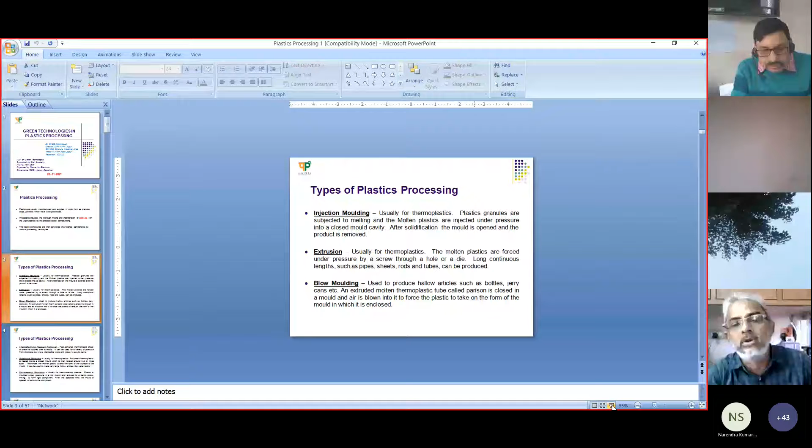What is extrusion? Extrusion is usually for thermoplastics. The molten plastics are forced under pressure by a screw through a hole or die. Extrusion is generally done for hollow products, like producing a pipe, electrical conduit pipe, agriculture pipe, or water irrigation pipe. It is a continuous process, so you can produce a hollow product like pipes, or a profile like a sheet, such as plastic doors. These are made with extrusion only. The molten plastic is continuously forced through a die or hole, so long continuous lengths can be produced, such as pipes, sheets, rods and tubes.

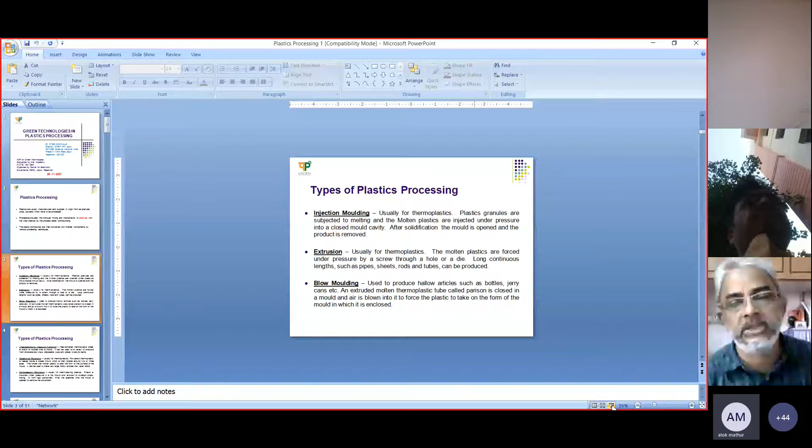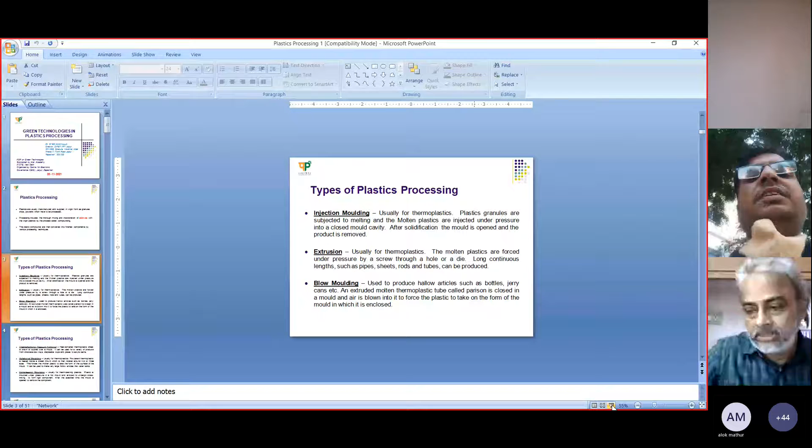Then blow molding. Blow molding is generally done for producing jerry cans or water tanks, like overhead water tanks of 250 liter, 500 liter, 1000 liter, up to 3000 liter big tanks, using blow molding. Whatever the size of the product, that much tube is extruded, then closed in a mold, and using blowing air, it is expanded to the shape of the product. I'll discuss that in detail later.

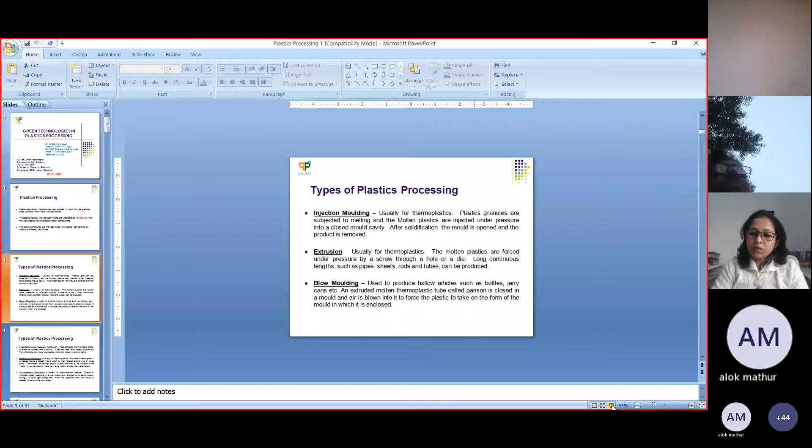Then we have rotational molding. We already discussed blow molding, so the replica of that is rotational molding. Instead of producing a plastic molten tube and blowing air into it to make a product, here you have a big mold, and in that you add plastic powder into the mold, then close it, and it is a hot mold.

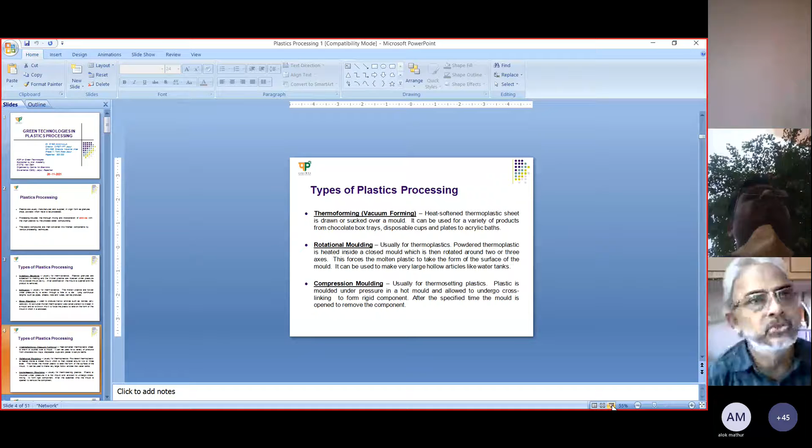Inside the material is completely melted, and you are rotating the mold biaxially, both vertical and horizontal, simultaneously. So the mold completely takes the shape of the inside mold, and once you remove it, you can produce the article.

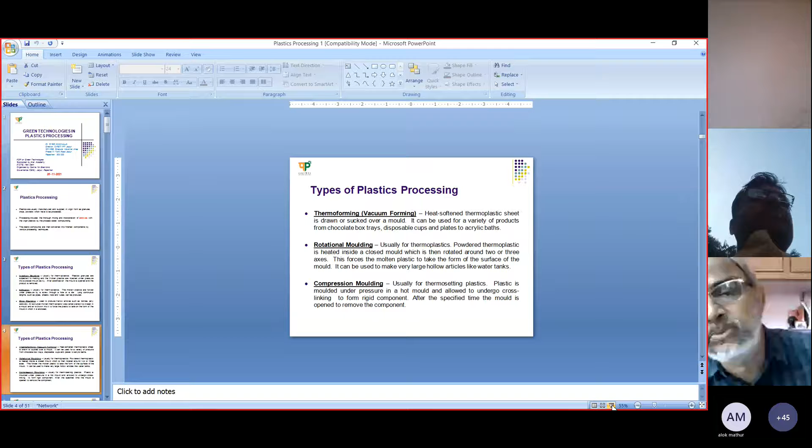Then we have compression molding. Everybody knows about this very simple process, usually for thermosetting plastics. The material is melted and a hot mold is there in the two plate compression molding machine. You add the plastic material, close the cavity, run the cooling water, and you produce the products. So compression molding is simple.

Then calendering process also is there for producing plastic products, like vinyl flooring you would have seen. Now railways or omnibuses, the flooring is made up of polyvinyl chloride. So these are all produced in the calendering process.

Then casting is there, like metal processing people, mechanical engineering people may know. So casting process is also there in plastics processing, mainly used for thermosetting materials.

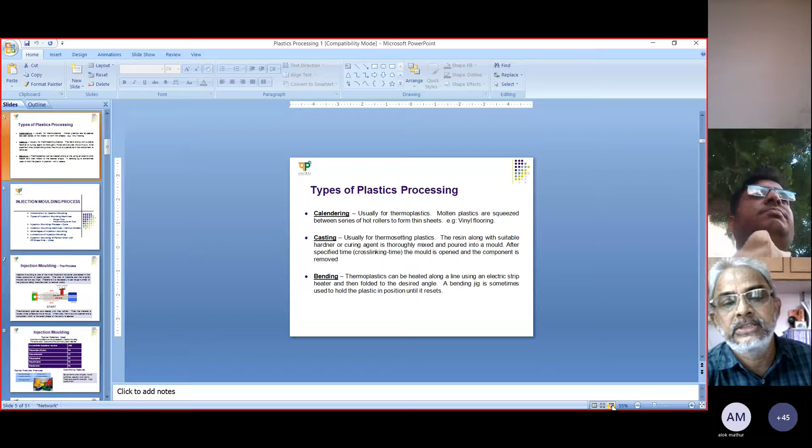Then we have a bending process, where thermoplastics can be heated along a line using an electric strip heater and then folded into the desired angles. This process is also done, but it is very rare.

So mostly the injection molding process is used. Now let us go to the injection molding process.

This is the, sir आपको दिख रहा है अभी? Yes sir, दिख रहा है. हाँ, yes sir, injection molding the process. Yes sir. Okay, now we are in line. Okay, but when I am making a presentation, it is not coming. That is the issue. Okay. Screen बहुत छोटा दिख रहा है ना sir? नहीं, कोई बात नहीं sir.

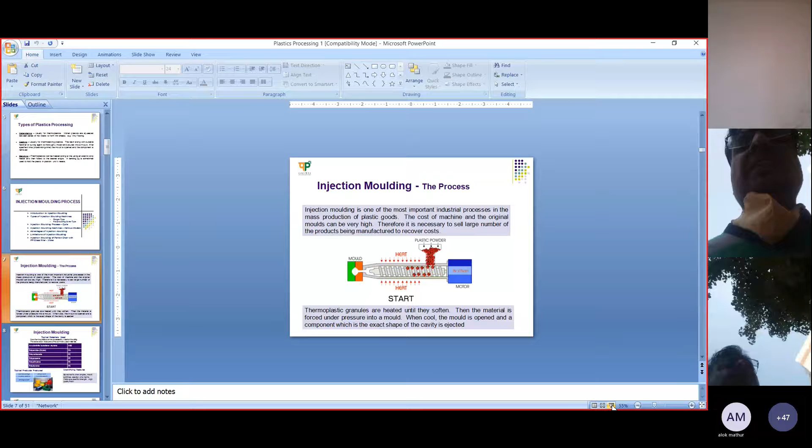Injection molding, in a simple way, is one of the most important industrial processes in the mass production of plastic goods. The cost of the machine and the original mold can be very high.

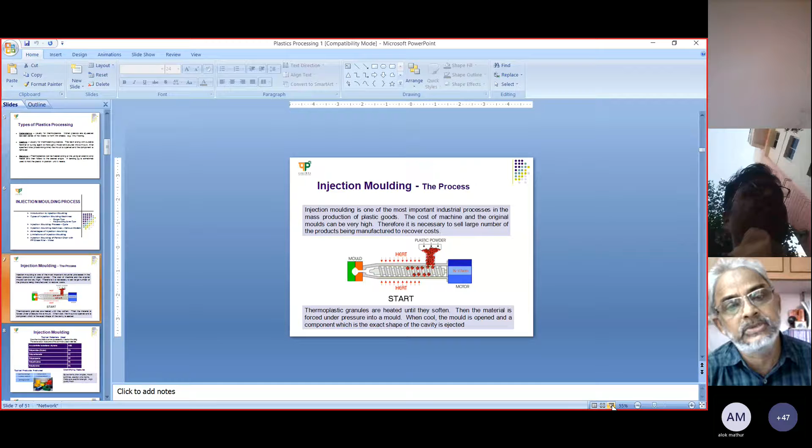Sometimes, for your chair, I have one video I will show you. So producing a chair, the machine is, say for example, around 50 lakhs, and the mold may cost more than the machine. Because the mold is more intricate, parts have to be manufactured and assembled, so the mold cost goes up. Similarly, the type of material, which type of hard steel you are using, or HS, whatever it may be, that kind of steel quality also increases the price of the mold. So sometimes the mold cost will be very high.

Therefore, it is necessary to sell a large number of the products manufactured to recover the cost. So generally in injection molding, mass production is done. It is a batch process, not a continuous one. After one component, another component is produced.

Here you see the plastic in powder form or granules is fed through the hopper into the barrel, where inside the barrel we have a screw and heaters are banded onto the barrel. So when the barrel gets heated and the screw is rotating, the material is slowly melted and conveyed to the front portion of the injection molding machine.

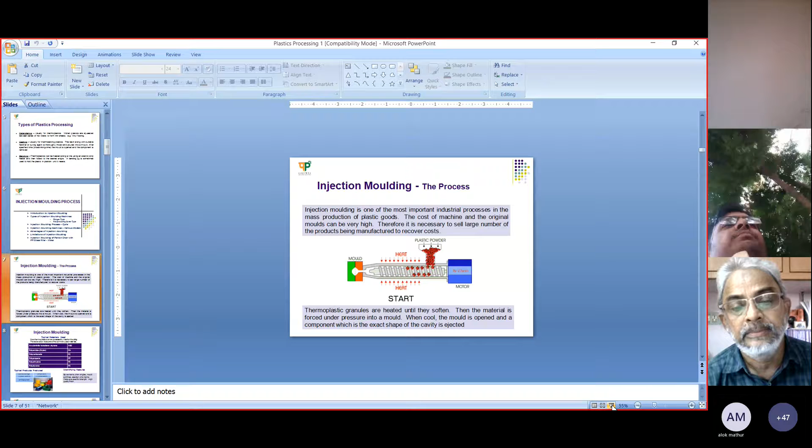So thermoplastic granules are heated until they soften. Then the material is forced under pressure into the mold. When it cools, the mold is opened and a component, the exact shape of the cavity, is ejected.

So this is the typical materials used. There are many materials; for example, I have given some here: acrylonitrile butadiene styrene, polyamide that is nylon, then polycarbonate, polypropylene, polyethylene, polystyrene. These are some of the thermoplastic materials I have mentioned here.

Generally ABS is used, ABS or PC-ABS blends are used in our mobile phones, TV cabinets, and so many applications we have PC-ABS. Then polyethylene, polypropylene are conventional thermoplastics used in domestic applications.

So typical products produced using injection molding, you can see, even the trays where you have milk crates are produced using the injection molding process. Big milk crates also can be produced. Even buckets, mugs, all these are injection molded materials.

Then we have identifying features like sprue marks, draft angle, mold split lines. These are some technical terms by which you can identify whether a product is injection molded or not. No need to go into that detail.

Then injection molded items, I have shown here: wireless phones, mobile phone casings, then plugs, and even a pen can be produced using the injection molding process. The steering wheel of the automobile is produced, and even the dashboard of your car can be produced using injection molding.

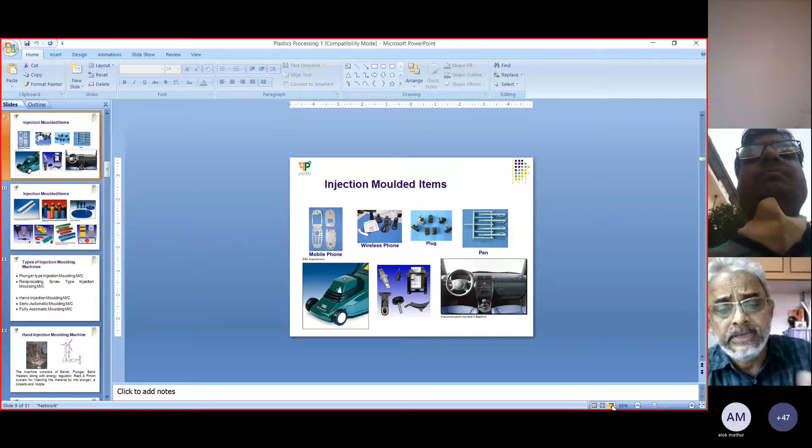Here I have seen some grass cutting machines or vacuum cleaning machines. These cabins, everything can be produced using injection molding. So injection molding is a very versatile process and very important in producing plastic components. These are other injection molded components you can see, examples, even a small comb as shown here. Even electrical components are produced using injection molding. See, these are the injection molded items. You will be surprised to see so many things are produced using injection molding.

Very high precision injection moldings are used for producing very fine engineering products like mobile phone casings and all these things, right? So these are also other products you can see.

Now you see types of injection molding machines. Are you able to see? Yes sir, types of injection molding machines.

As I told you in the very beginning, all plastic technology is only around 5 decades old. Not much before 1960s, nobody knew what plastic materials are. These are all new materials, invented with the long chain molecules by Hermann Staudinger. These were introduced to our civilization, and now we are almost living in the plastic age, right?

So at the very initial stage, plastic injection molding was plunger type, very old type. Then reciprocating screw is mostly used nowadays in commercial machines - reciprocating screw type injection molding machine. For giving training to skilled manpower, you start with even a small hand injection molding machine, semi-automatic, and fully automatic machines with fully microprocessor controlled machines are available, right?

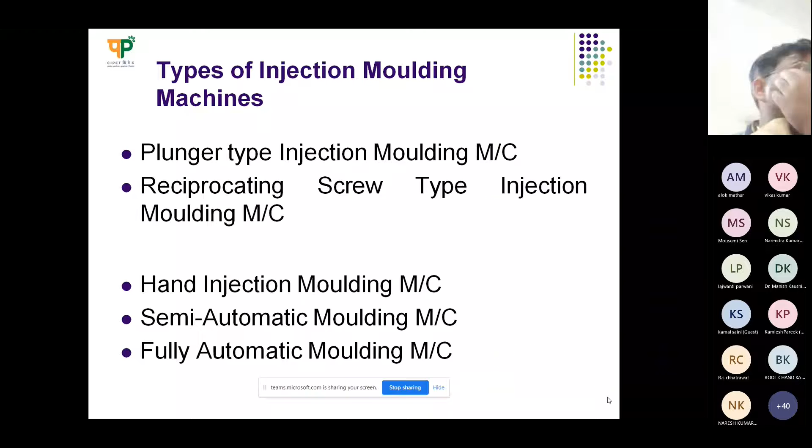But this is not very economic now. Almost all hand injection molding machines are now used only for training purposes, that's all, right? So the machine consists of a barrel, plunger, and band heater, along with the energy regulator, rack and pinion system for injection - injecting the material by plunger. A torpedo and a nozzle will be there.

Next slide, you see this here now. So there is a vertical injection molding machine on the left side, and a horizontal injection molding machine.

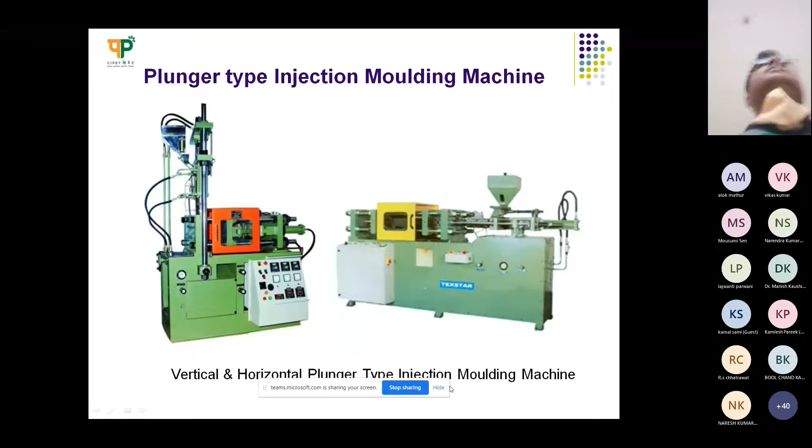Now it's clear, sir, the slides? Yes sir, thank you so much. Now I think the problem is solved. Sir, it is very good. Don't ask again, thank you, thank you.

So the plunger type injection molding machine you see here, it will have a plunger which can move up and down, and where we have the bottom, we have a mold kept here, and this is the barrel where the plastic mold melt is accumulated, and it will be pushed into the mold. This is another block diagram.

You can see the reciprocating screw type injection molding machine, where we have a cross section of the machine here. Now we have a barrel. The pink color is the material which is melted, and it is pushed into the cavity where we have a U type component here, right?

So the molten plastic granules are fed into the hopper, and then it is melted due to the band heaters of the barrel. I can tell you, when the granules are touching the barrel, there will be a very small clearance. So most of the melting energy is produced by friction. 80% of the energy required for melting the plastic granules is produced through friction between the barrel and the screw, and the barrel itself is a hot surface. So the remaining 20% energy is derived from that, and it will be completely made into a homogeneous molten plastic material, which will not have any granules or particles, nothing. It's a completely liquid kind of highly viscous molten thermoplastic material which is accumulated in the front.

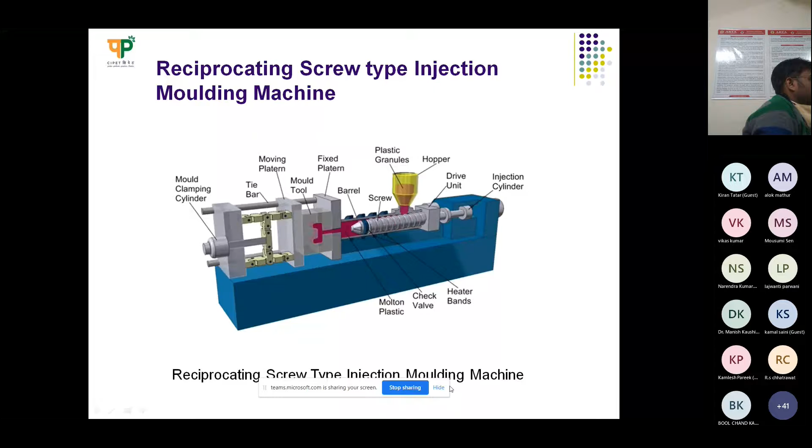So near the feeding we will have more gap, and when it comes to the compression zone, the gap will be reduced and the pressure will increase, friction also will increase, and the material will become completely melted. So when it comes to the metering zone, the melt is pushed and conveyed to the front portion.

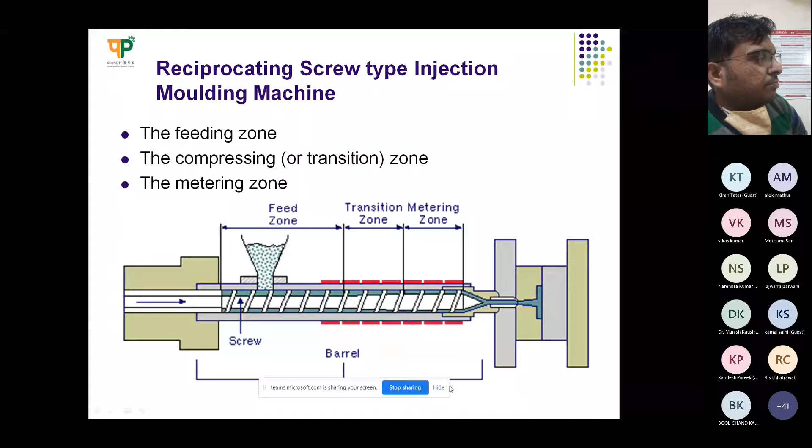These are the various components of an injection molding machine, where we have a rotating and reciprocating screw. Then there's a barrel, band heaters, the hopper, and nozzle. You can call these some of the components or parts of the injection molding machine.

So the injection chamber, where the melt is accumulated, and immediately the product you can see, that is called sprue. So it is actually waste. You have to remove it, and then you can again melt and recycle it, use it again.

This is the stationary plate which is attached to the nozzle, and the movable plate will be attached to the toggle system, where the opening and closing of the mold takes place.

The injection process: the reciprocating screw plasticizes the material, meaning it makes the melt - the granules will be completely fused and melted. It then injects the molten material into a closed mold via a channel system of gates and runners.

You have multi-component, multi-cavity systems. So at one stretch you can produce 10-15 components, and sometimes for small components, even 100 components can be produced.

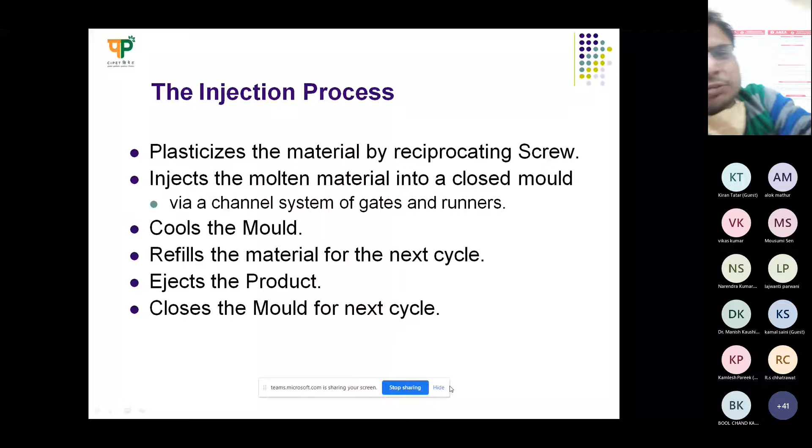In that case, the melt will be running in the mold, that is called the runners, and the gate point is where the material enters into the cavity. Then the mold cools, and after solidification you can remove the product. This is called a complete one cycle.

Then again the mold is closed for the next cycle. So these are the various processes you can see.

In the first phase, the mold is closed and melt is ready for injection. Then the cavity fills as the reciprocating screw moves forward as a plunger, and the melt enters into the cavity.

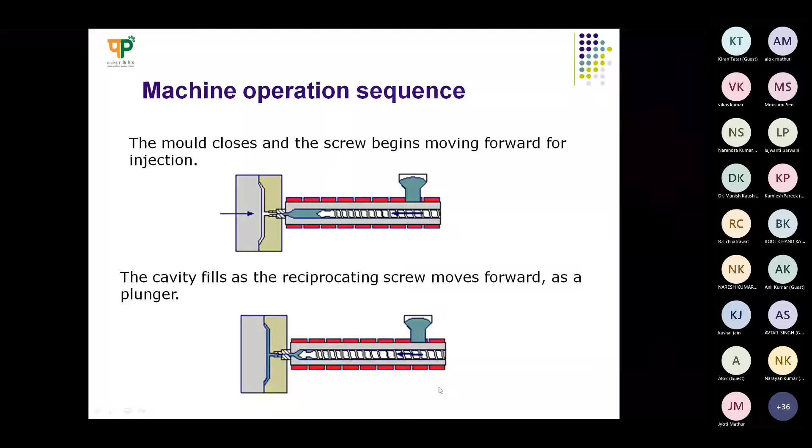This is the second step. This is the third step now, where the cavity is packed as the screw continuously moves forward. Then the cavity cools as the gate freezes.

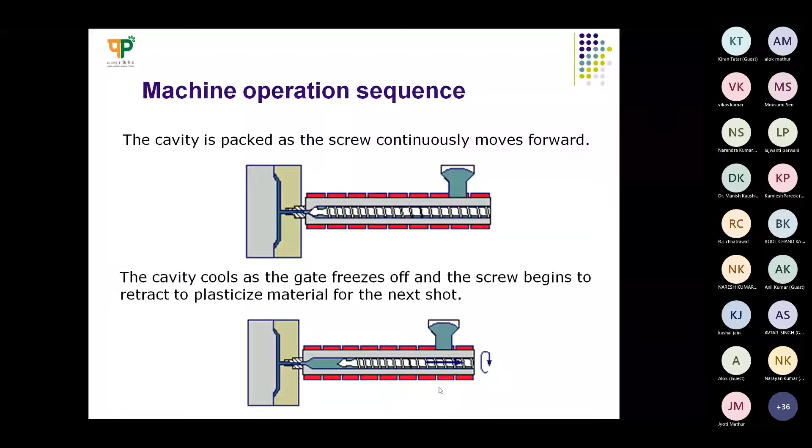This is the point where the gate is, where the melt enters into the cavity. So once the gate freezes, the screw goes back. Then the component is solidified and removed from the mold - the mold is opened, the part removed, and then the mold is prepared for the next cycle.

Again, here it is illustrated in different diagrams - three plate mold, two plate mold. These kinds of terminologies are used in injection molding.

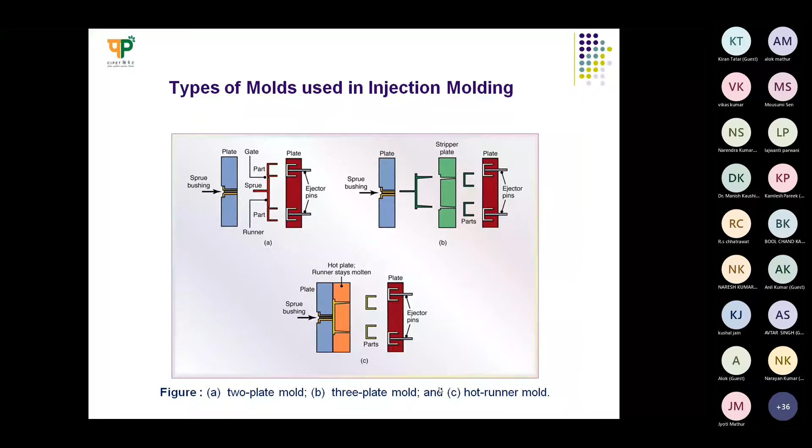Injection molding machines differ in both injection unit and clamping systems, as I told you. There have been a lot of developments in this, and more advanced machines have come. Sometimes hydraulic systems are used for clamping the mold, where oil leakage and oil consumption will be there - again oil filling, these kinds of problems will be there.

So advantages of the injection molding process, these are all I'll give you later. Parts can be produced at high production rates. Large volume production is possible. Relatively low labor cost per unit is obtainable. The process is highly susceptible to automation.

Parts require little or no finishing, right? At this stage, you can produce the finished product. Many colors and finishes are available, which can be added into the granules. Complex shapes can be molded, and for many shapes this process is the most economical way to fabricate. The process permits manufacture of very small parts, which are almost impossible to fabricate in quantities by other methods.

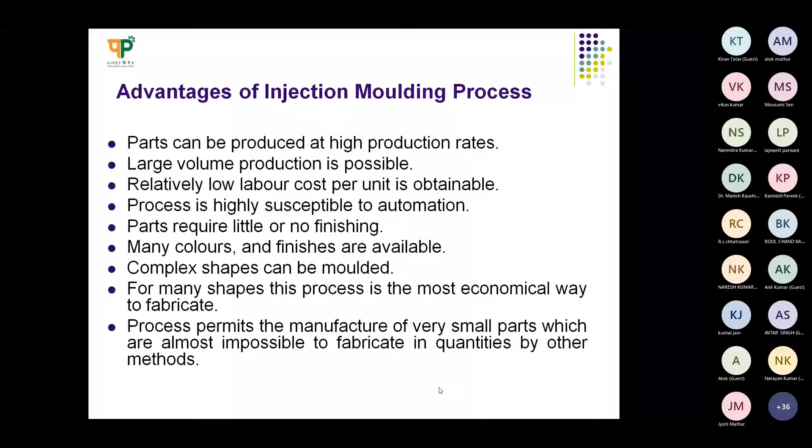These are some of the other additional advantages, like wastage will be less, and close dimensional tolerances can be achieved.

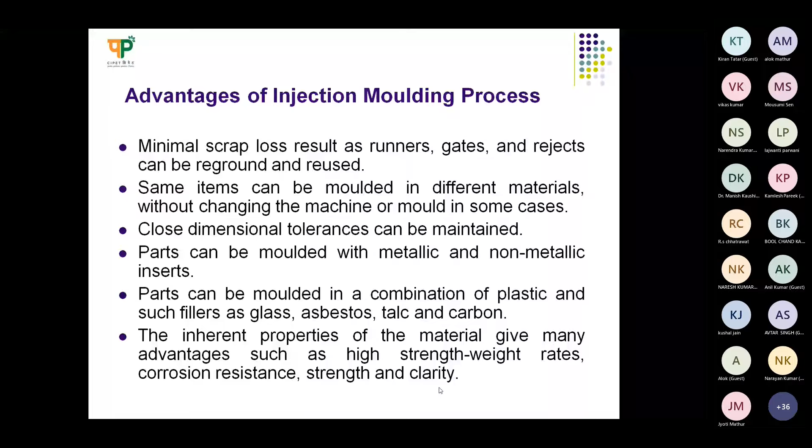Limitations, let us see what are the limitations. Intense industry competition often results in low profit margins. Like if you are becoming an entrepreneur, you hire any machine, anybody having an injection molding machine, you give the mold and try to produce. They are producing it at very small margins, like running the machine 8 hours at whatever rate. Probably even a 250 ton capacity machine cannot be more than about 2500 rupees for 8 hours of machine use.

Mold costs are high. As I told you, making a mold is a mechanical engineering job, and for more complicated shapes you have to use advanced machining processes in mold manufacturing. Conventional methods you cannot use, so you go for wire cut EDM or CNC milling. So many processes are used to produce the mold parts, and then finally you do the assembly of the mold. In such cases, the mold cost goes high.

Molding machinery and auxiliary equipment costs are high. Lack of knowledge about the fundamentals of the process causes problems. Lack of knowledge about the long-term properties of the material may result in long-term failures.

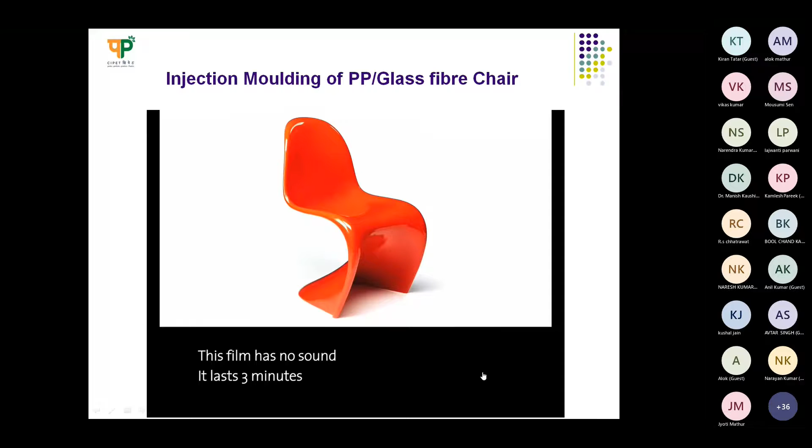Here I have one injection molding example of a PP glass fiber chair. Please see this. This is a very innovative chair which was designed in the 1960s by Werner Panton. So the name of the chair itself is the Panton chair. Are you able to see the video? Yes sir, thank you.

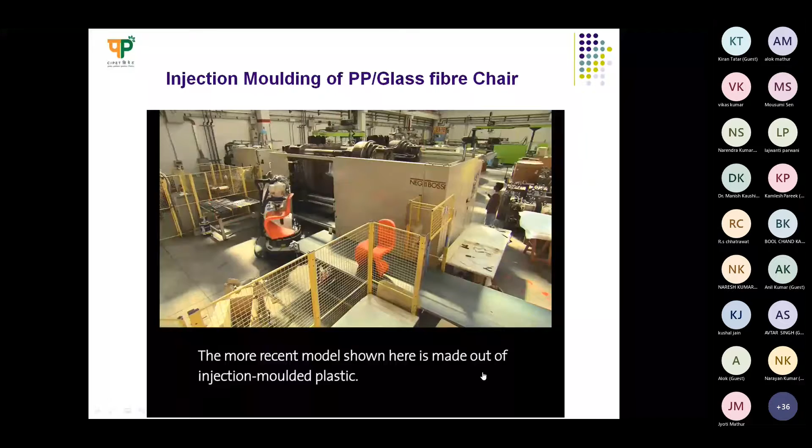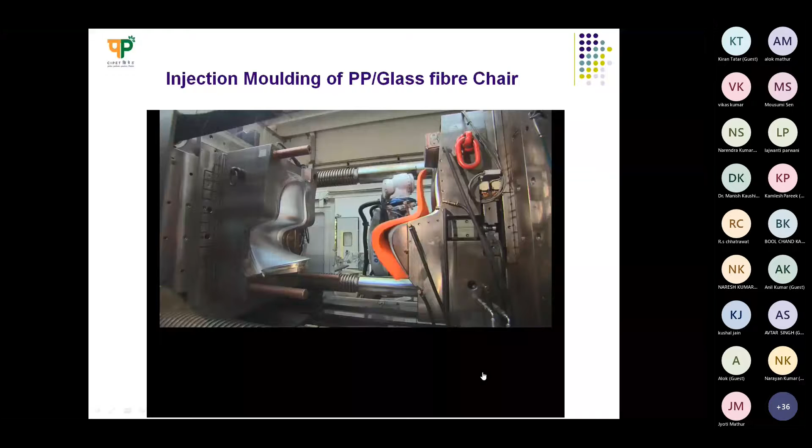This is a PP glass fiber reinforced polypropylene material. The advantage of this design is you can stack one above the other, and it is a very sturdy one-piece chair. You can see the mold cost of this will be much higher than even the machine. The mold weighs around 10 tons and is in two parts. You can see the surface is highly polished and chrome plated.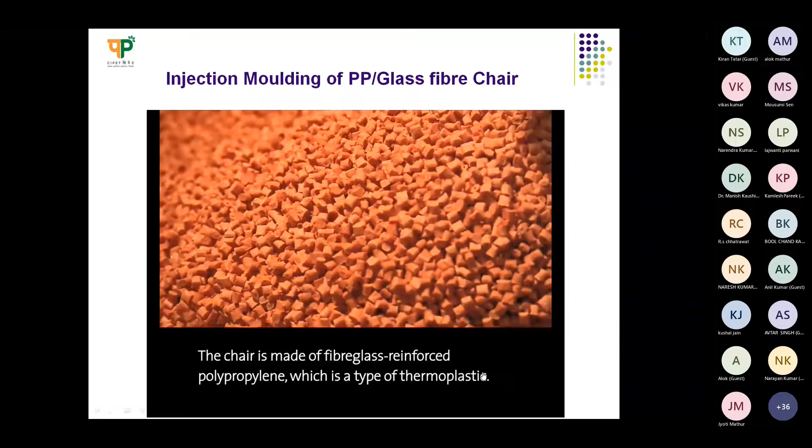These are the PP granules, which are glass filled. Polypropylene is generally produced in the refineries. Why are we putting glass fiber into the polypropylene? To increase the strength.

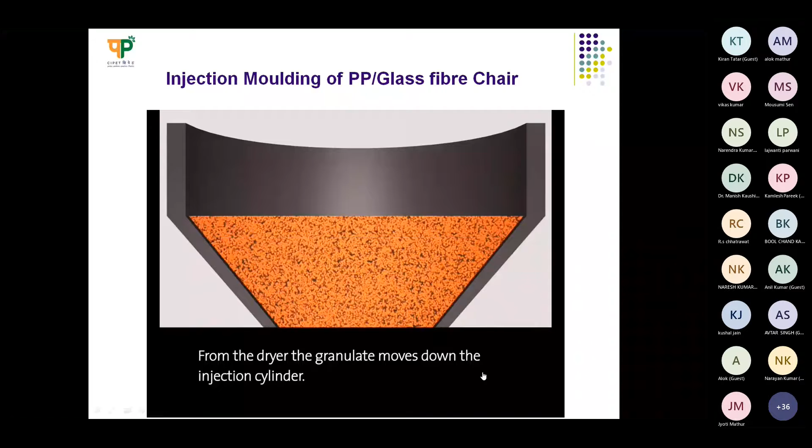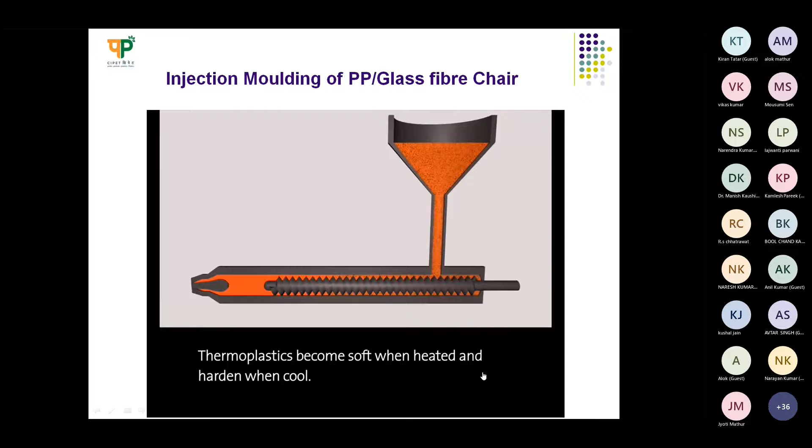These are some of the automations you can see. Here even the robo system is used to remove the product from the mold. So from the hopper, the granules enter into the barrel, where the screw is now operated, you see. When the screw moves forward, the melt is injected like that, you see. This is a plunger now. The screw is reciprocating as well as the plunger, both.

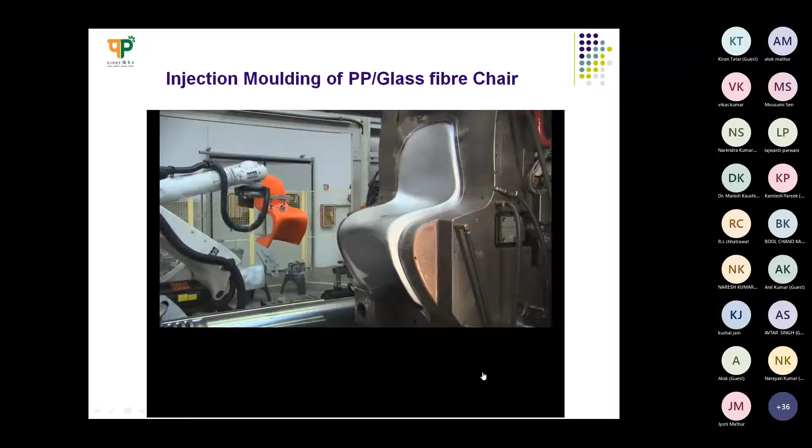The melt has taken the shape of the component, that is the sprue. This is a hot runner mold, another concept. You see that the complete sprue can again be in the melting stage itself. Only a small portion has to be cut, you can see that. See, very, very small. After this is a hot runner mold system.

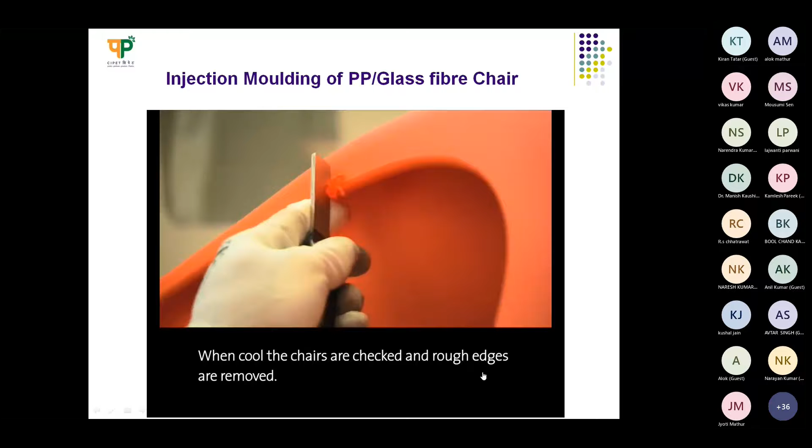So these are some of the advantages, as I told you. In every process, whether injection molding or extrusion, developments have taken place time to time, and a lot of advanced machines have been produced. Thank you.

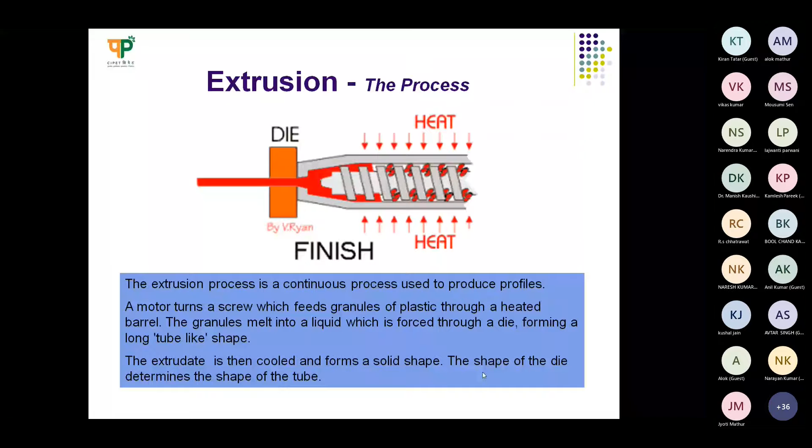Extrusion process is a continuous process used to produce profiles. Here also you have a barrel and screw, and the melt is continuously pushed through the die - instead of a mold, here you have a die. Then the extrudate is cooled and forms a solid shape.

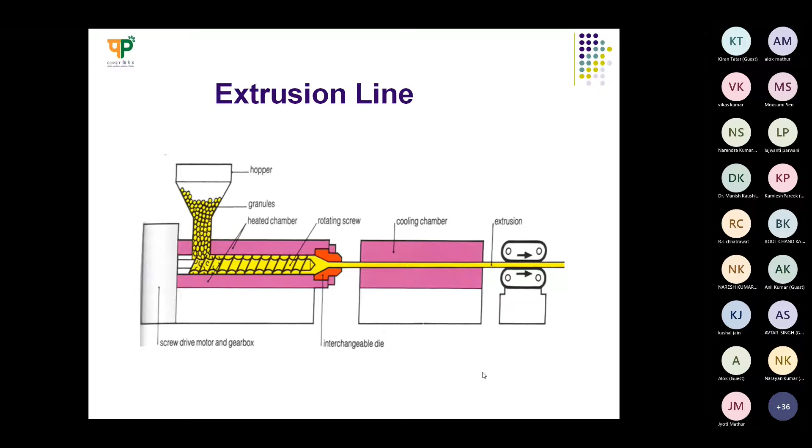The material is melted in the extruder, and the molten plastic is pushed from the extruder through a die, taking on the shape - whether circular or whatever it may be. The molten plastic emerging from the die is called extrudate, and it must be cooled, usually pulled through a water bath, then through a pull track. The extrudate is also subjected to a sizing process, once the melt emerges from the die, to maintain the dimensions.

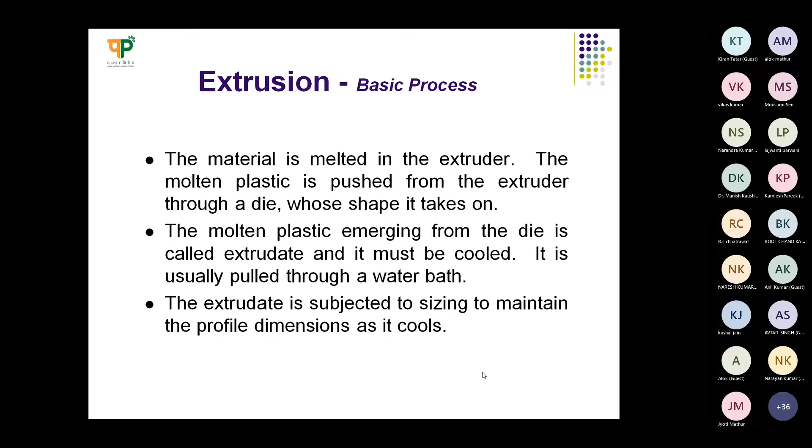Any profile you have to do the sizing, then only you will have a uniform size. Sizing is done to control the shape of the molten polymer as it enters the cool bath. If there were no sizing die, the molten polymer will shrink uncontrollably before it solidifies and collapse.

Sizing is important because inside, the material is molten and pushed through the die. When it comes out of the die, the sizing process controls the shape and wall thickness of the product, the dimension, stability, everything. I will show you what the sizing processes are now, and I have a video to show in extrusion also.

Sizing is of two types: pressure sizing or vacuum sizing. Either you suck the air so the product sticks onto the sizing die and maintains its shape, or you use internal pressure. Pressure sizing uses an internal floating plug whose diameter equals the inner diameter of the pipe, and internal pressure is applied to maintain the dimensions of the pipe.

I will show the process so you can understand more. The pipe's dimension has to be maintained. Inside, you can introduce some pressure air, and by that way you can control the shape. Or you can send the extrudate into the vacuum system, so that also you can control the size.

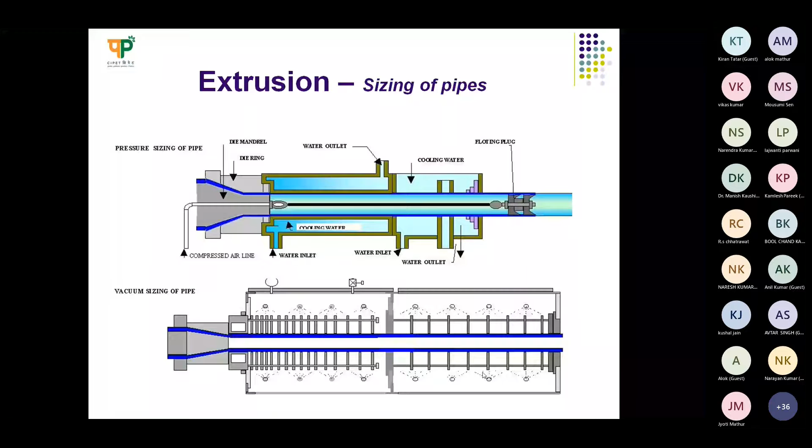The second one is vacuum sizing, where a lot of air holes will be there. When you suck the air, the product sticks onto the sizing die walls and moves forward to get a continuous product. So sizing is of two types, and it is very important to maintain the shape and dimensions of the product. That much you can remember.

Then it finally goes to the puller. A puller is used to pull the plastic extrudate through the cooling tank after it leaves the die through the sizing unit. It usually pulls faster than the velocity of the plastic melt emerging from the die, which causes orientation of the polymer chains and controls the wall thickness of the profiles. The profiles passing through the puller are taken to a track, cut into required sizes, and stacked. These are various profiles which you can make.

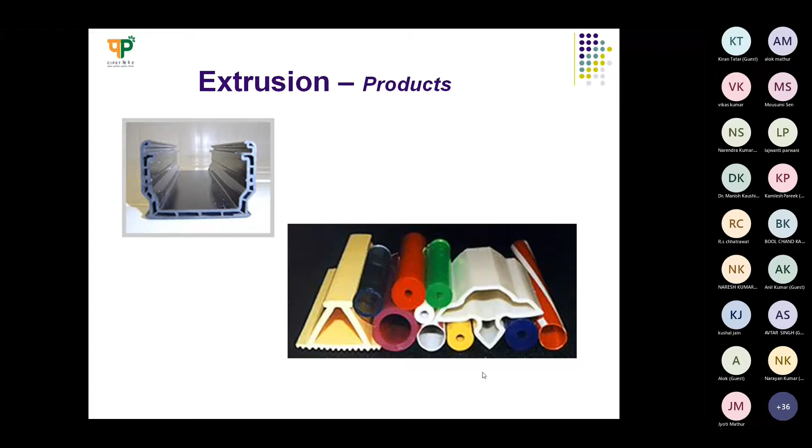Nowadays plastic windows, doors, and pipes are all produced using extrusion only. Here you can see the process in this video. This is a PVC pipe extrusion line.

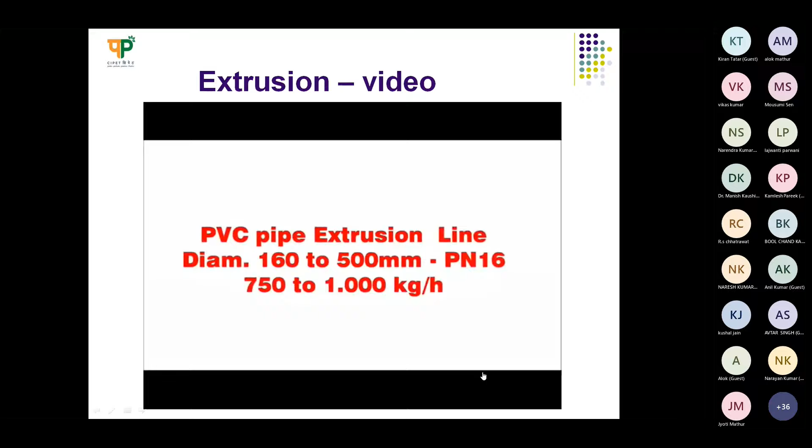This is the die, so the molten material is coming out. It is collapsing, you see. If you don't do the sizing, it cannot maintain the shape.

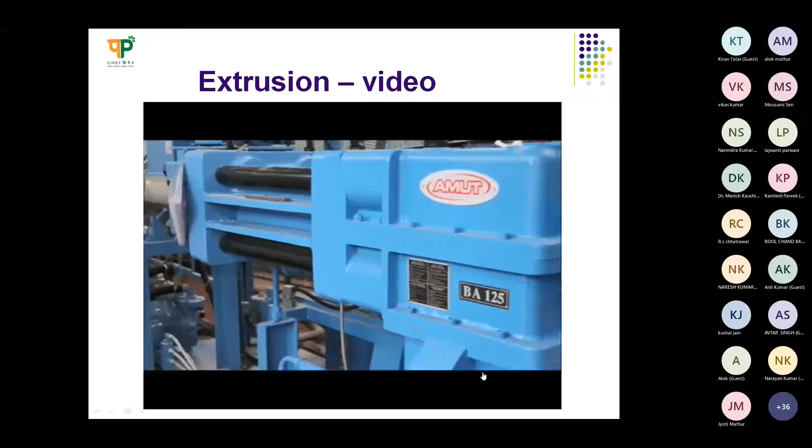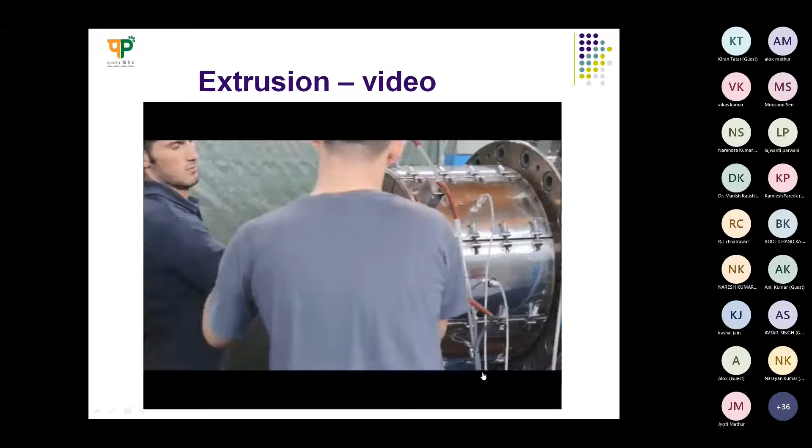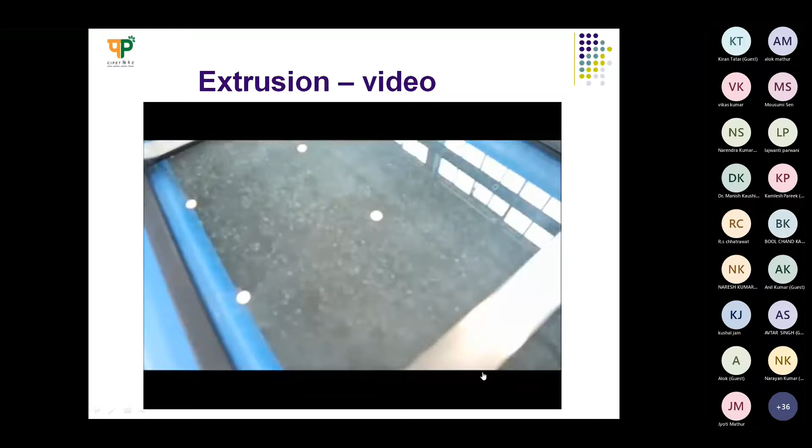Initially when you make the product, some wastage will go. Now this is the sizing unit. It is cooled. That is the pull track.

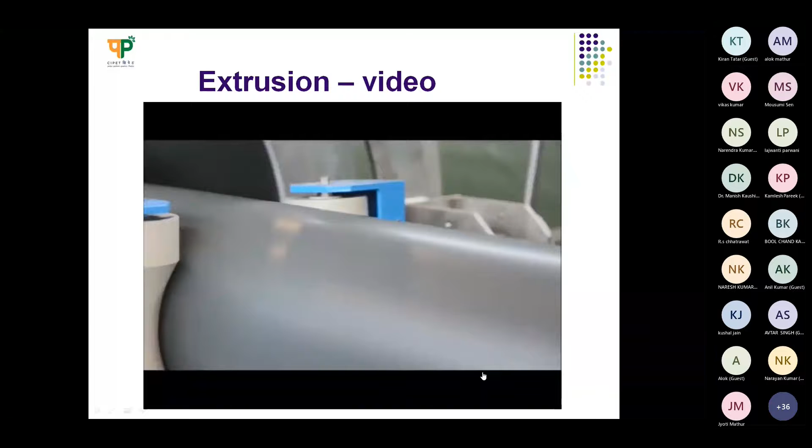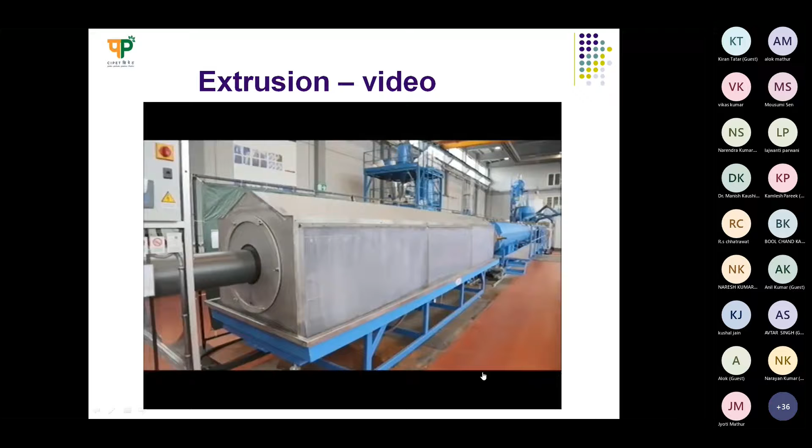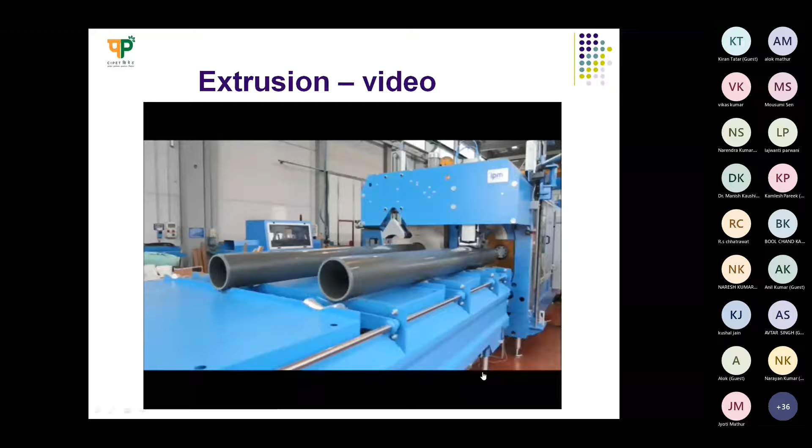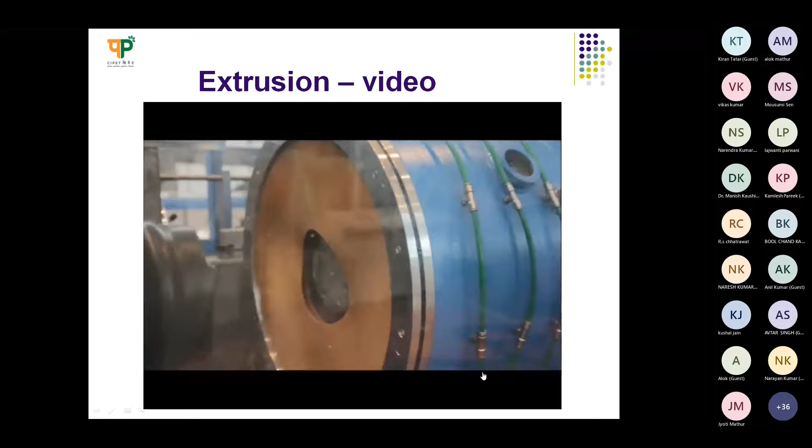Whatever the brand is, they will print there, for example if it is ISI brand. Simultaneously, printing is also done, automated, everything. Now this is the cutting. Generally they keep a 6 meter length. This is where the coupling is made, to join one pipe to another you need a coupling.

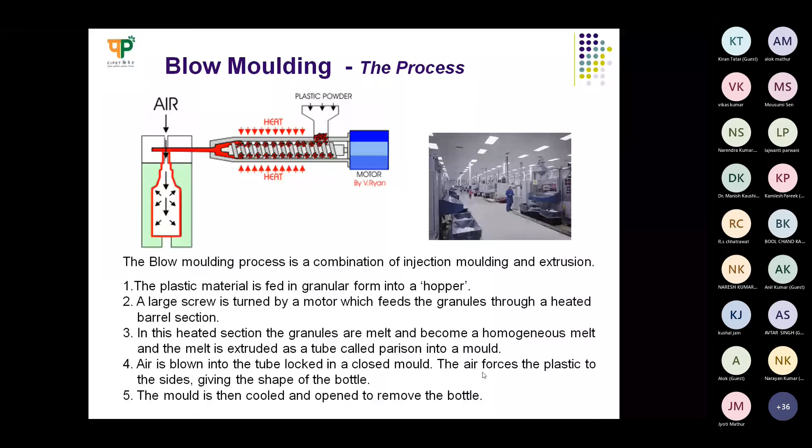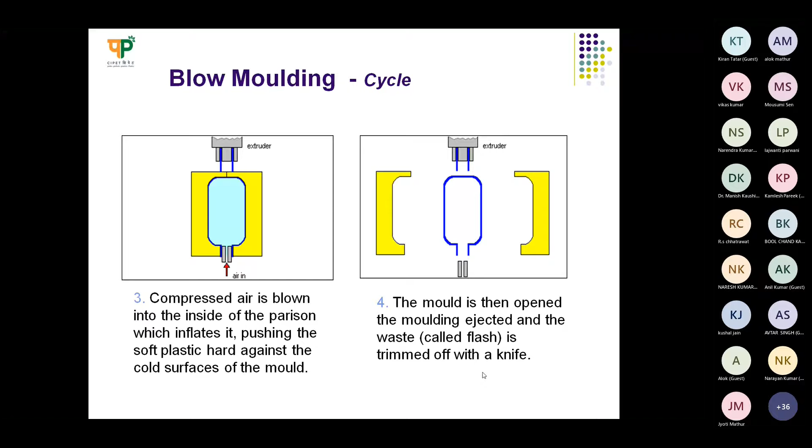This is a simple representation where the tube is extruded, called the parison. A hollow length of plastic called parison is extruded down between the two halves of the mold. The mold is closed in the second step. In the third step, compressed air is blown into the parison and it takes the shape of the mold bottle, and once cooled, the bottle is removed.

The bottle blowing air can be on the top or bottom, any way you can have it. Mostly where the open part is, that is the mouth, that's where you have the blown system.

This is the difference between injection blow molding and extrusion blow molding. For bottles over half a pound, tooling costs are 50% to 75% less, it generates 20 to 30% scrap, and additional machinery is needed to grind scrap. Total cycle time is shorter, there's a wider choice of resins, and greater flexibility in part design. These are all the extrusion blow molding advantages.

Whereas in injection blow molding, we have long runs and smaller bottles, no trim scrap. Take beverage bottles and packaged drinking water bottles as an example. They are initially produced in injection molding as a small bottle shape, very small. So even a 2 liter bottle starts as something like a 100 ml bottle, slightly more than that. These small bottles are produced in injection molding with more thickness of the wall. This is called a preform.

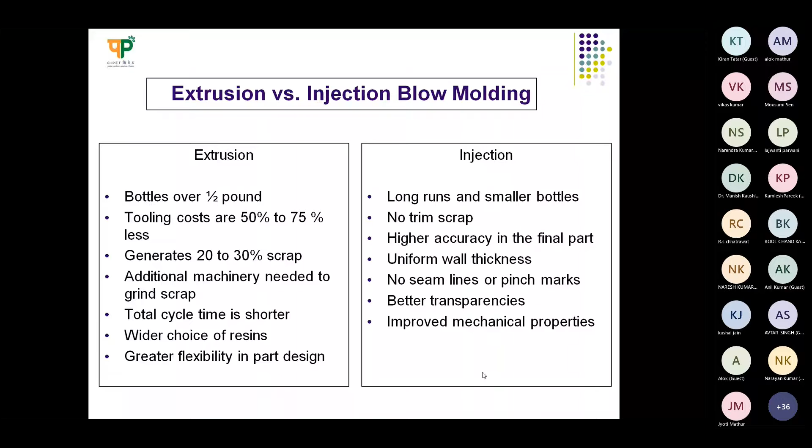It is called stretch blow molding. In that process, one pin will be stretching the bottle to the bottom, and then it will be expanding also. Then vacuum forming will go. Vacuum forming, as I mentioned, is produced for a sheet which is now heated.

Then the bottom mold is there. Once you suck the air, it will occupy the shape of the mold, which is heated. Once it is softened, the mold is taken up. The mold has fine pores in the bottom. Once you apply the vacuum, it will acquire the shape of the mold. This is the vacuum forming process where you produce disposable plates, or sometimes even bigger shapes can be produced this way.

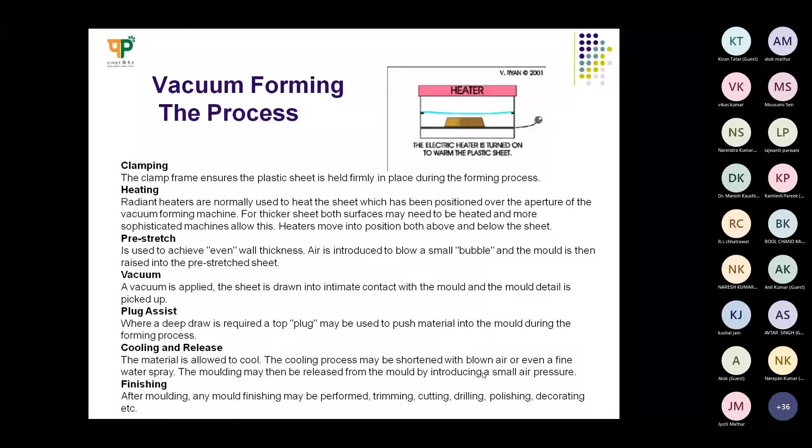In these different steps of the vacuum process, there are different components: clamping system, heating, pre-stretch, vacuum, plug assist, cooling and release, finishing. All these are the operating steps in vacuum forming. You can see some of the components produced using vacuum forming.

Then rotational molding, as I told you, is used to produce big water tanks, where you keep the powdered thermoplastic material into the mold, and then cover it. So this is what you can see. Then it will rotate.

The hot mold is rotated biaxially, horizontal as well as vertical. Once the plastic material is melted, it will flow in the mold because of the rotation action of both horizontal and vertical rotations. It will acquire the shape, and once you cool it, you can open the mold and take out the product. Nowadays, underground septic tanks are produced using this technique. Very big septic tanks, even water tanks, are all produced using rotational molding.

The brand Sintex is one of the largest rotational molding component producers.

This presentation, I will stop here because I will not go into more details about this now. These are all the processes we have seen for... what do you call it?

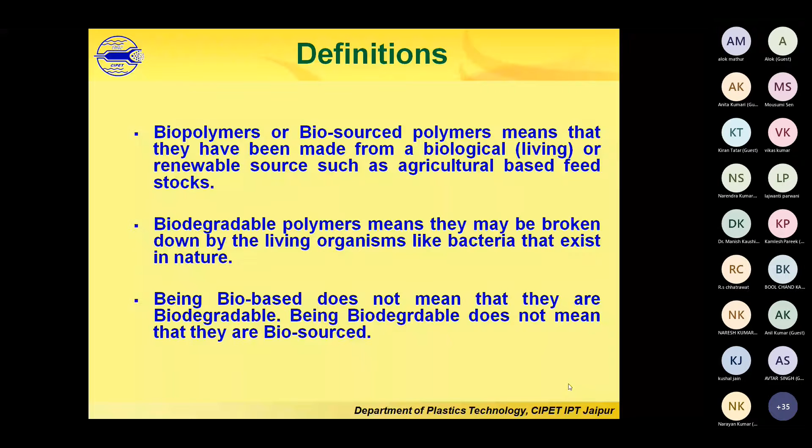First and foremost, a biopolymer that does not biodegrade is natural rubber.

Natural rubber comes from a tree. People in India, mostly from Kerala, may know what rubber is and how it is cultivated and finished into a product. Generally, natural rubber is produced from a tree, called the rubber plant. It is not a small plant; it has to be at least an 8 to 10 year old big tree before you can tap it.

Tapping means you make a V notch on the bark of the tree, and the latex comes out as a rubber milk. It is exactly like milk, and this is called latex. The latex is collected from the tree and coagulated, separated from the remaining water content, and then rubber is extracted. This is processed into sheet or crumb form. Crumb means large bulk rubber, or you can also produce it in sheet form. So this rubber is extracted from the tree.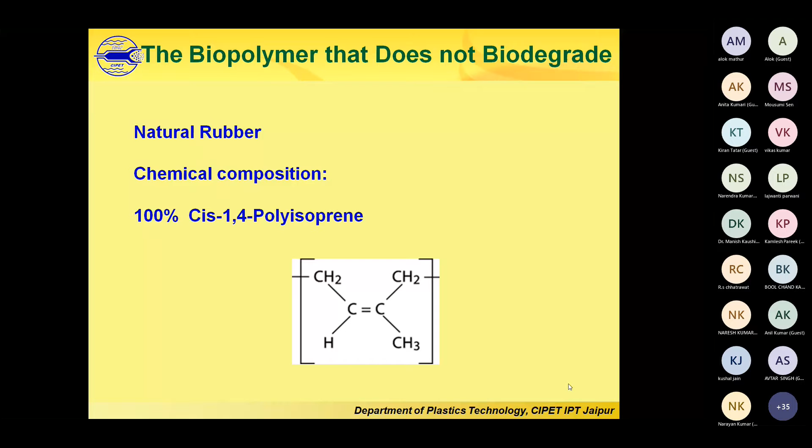Coming to the other bioplastics, apart from rubbers, some bioplastics are produced from starch, like vegetable oils, corn starch, potato starch. So instead of fossil fuels, you can use these agricultural feedstocks for producing plastics. So bioplastics are not new.

In the 1850s, a British chemist created plastic from cellulose, a derivative of wood pulp. Later in the early 20th century, Henry Ford experimented with soya-based plastics in his automobiles. After that, bioplastics began sparking interest during the oil crisis in the 70s. The 1980s brought items such as biodegradable films, sheets, and mold forming materials.

The need for replacement of petroleum-based plastics with bioplastics is because producing conventional plastics consumes 65% more energy than producing bioplastics. So it is a green concept, right? Producing bioplastics is less energy consumption.

Ever increasing crude oil prices. Now there's no need to explain the current scenario, right? Similarly plastic material prices also increased. Many of us as common public know the difficulty in buying fuel, petrol or diesel, with very high price which has shot up to more than 100 rupees. Similarly polyethylene or PVC which was sold around 80 to 90 rupees has gone up to 125, 130 rupees. The plastic industry is suffering the same impact now because of high raw material costs. These kinds of things may become worse in the future. Whatever is bad now may become worse also in future.

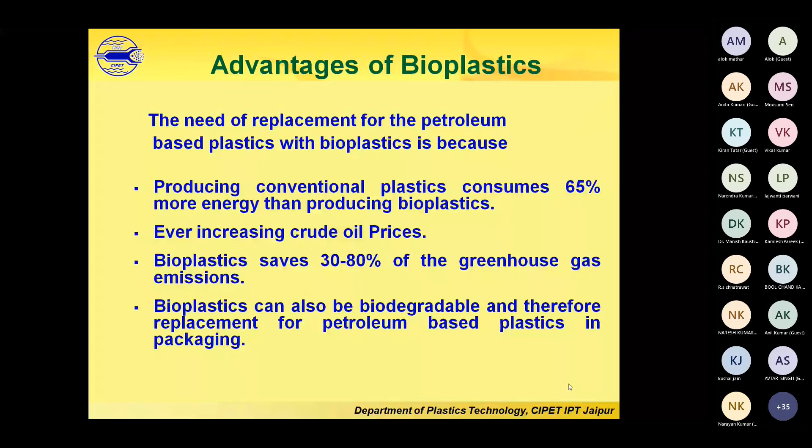Bioplastics can also be biodegradable and therefore serve as a replacement for petroleum-based plastics in packaging. Like PLA based, polylactic acid based plastics are biodegradable.

Bioplastics have several other important advantages over conventional plastics in bulk packaging, which are as follows. Compost derived in part from bioplastics increases the soil organic content as well as water and nutrient retention, while reducing chemical inputs and suppressing plant diseases.

Starch-based bioplastics have been shown to degrade 10 to 20 times quicker than conventional plastics. On burning, traditional plastics create toxic fumes which can be harmful to people's health and environment. If any biodegradable films are burned, there is little, if any, toxic chemicals or fumes released into the air.

Of course, these are all advantages. Why would we go burn it anyway? Safe biodegradability, safe for medical uses. Compared to conventional plastics derived from petroleum-based polymers, bioplastics have more diverse stereochemistry and architecture of the side chains, which enables research scientists great opportunities to customize the properties of the final materials.

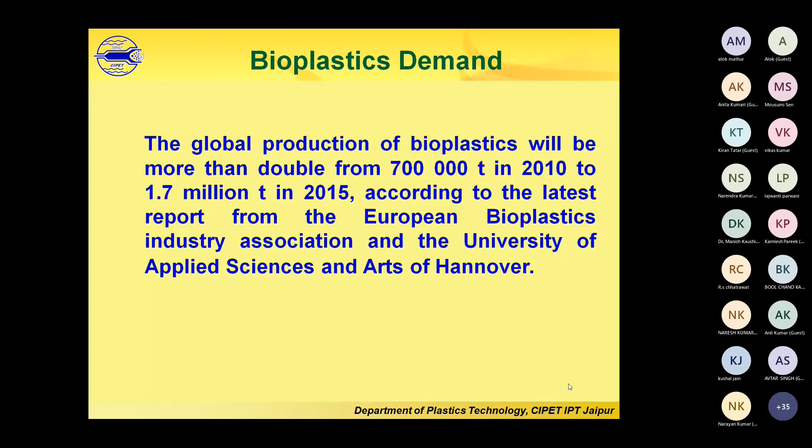Bioplastics can be made from many different sources and materials. Plant oils, like sunflower oil or similar oils, if used for producing plastics, then food shortage may come. Even using starch, corn starch or potato starch, or sugar cane, all these things can cause food shortage when you start producing tons of plastic materials.

So in such cases, you can use crops with non-edible oils like castor oil. Castor oil can be used to produce bioplastics. Similarly for starch, there are now non-edible agricultural products available, like tobacco or certain potato varieties, and that starch can be used for producing plastics.

In Brazil, Braskem is the company which has produced several tons of biopolyethylene, and now it is in crisis because they mainly use sugarcane. This is creating food shortage, which is why production from that source has been halted now.

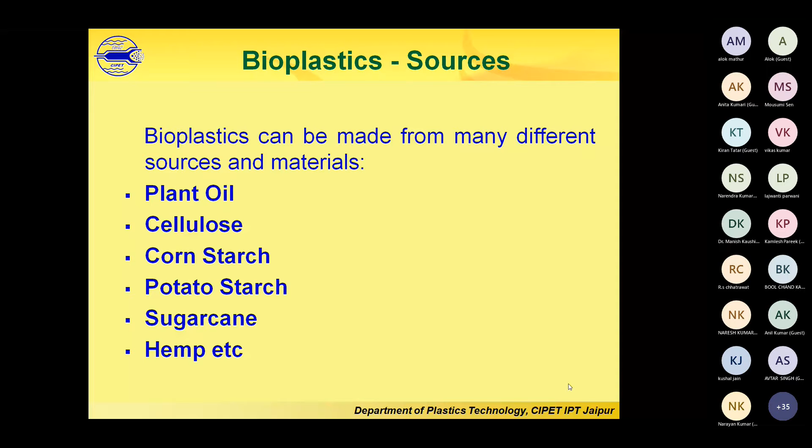Bioplastics are already commercialized and produced at industry scale. These are some of the feedstocks of bioplastics: you can use oils, corn starch, starch, potato starch. Can you tell me how plastic is produced from starch or potato?

They contain carbohydrates. Carbohydrates like fructose and sucrose are small carbohydrates. Then there are polysaccharides, which are starch and cellulose - these are bigger sugars. So these carbohydrates can be subjected to fermentation.

Have you heard about making dosa batter or idli batter? That batter in the early morning will be frothing, and you see a lot of gas formed there. That is nothing but ethyl alcohol, or similar alcohol, formed in the fermentation process. Ethyl alcohol has the chemical structure CH3-CH2OH.

You subject it to dehydration, remove the water molecule, and it forms ethylene. This ethylene is similar to what I explained initially from petroleum - we get naphtha, which is a waste product after producing petrol and diesel, then that is cracked through a chemical cracking process to produce ethylene molecule, then polyethylene.

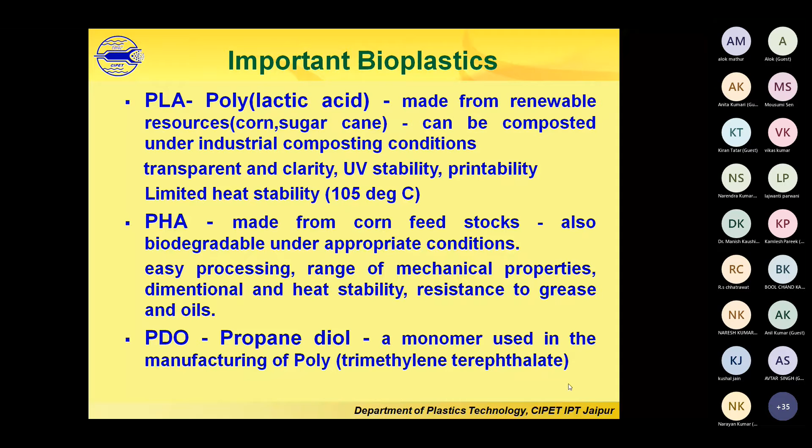Then PHAs, polyhydroxyalkanoates, made from corn feedstocks, are also biodegradable. Then PDO, propanediol monomer, is used in manufacturing polytrimethylene terephthalate - that's a PET bottle material, which can also be produced using bioplastic, bioPET.

This is how you make plastics from renewable resources like cane sugar or other carbohydrates. Carbohydrate is subjected to fermentation process, ethanol or ethyl alcohol is produced, then this is subjected to dehydration, you produce ethylene gas, and that ethylene gas is polymerized like petroleum ethylene gas, producing polyethylene.

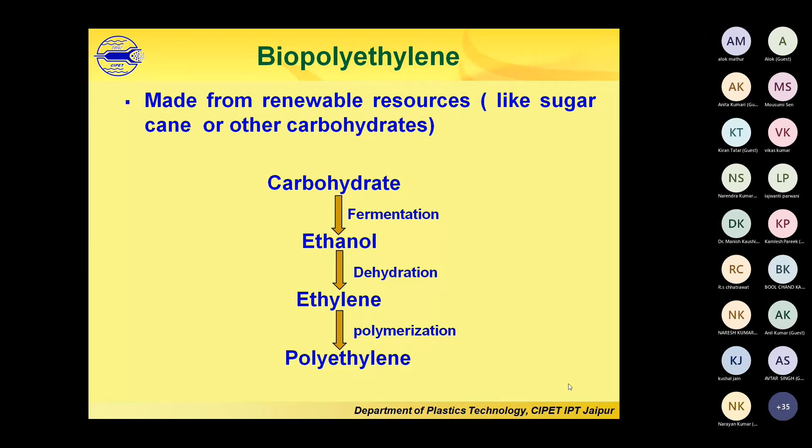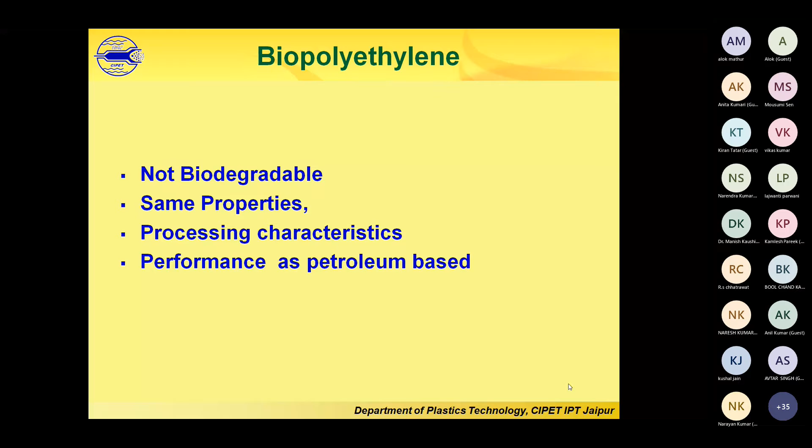Not biodegradable, same properties as petrochemical-based polyethylene, processing characteristics also same, performance also same as petroleum based. Biopolypropylene, biopolyethylene terephthalate (PET), biopolyvinyl chloride, biopolystyrene, biopolyurethane - anything you produce in petrochemicals, similar products can be produced here also.

This is what I was mentioning: Brazilian Petrochemicals and Polymers Group, Braskem, commits to producing bio-based polypropylene. Braskem started to supply its first bio-based polyethylene products earlier this year - I am talking about 2010. The resins are produced using ethylene manufactured from sugarcane ethanol at its new facility in Triunfo, in the Rio Grande region of Brazil.

So the company has earmarked $100 million for the project, which is expected to deliver first commercial resins to the market in 2013. It has produced also the plastic, as they promised. They produced huge quantities of bio-based polyethylenes, polypropylene and all, but currently it is halted.

I think you can browse and see what Braskem is now doing, right? They produce about 30,000 metric tons of bio PP and copolymer per year. They have already produced this.

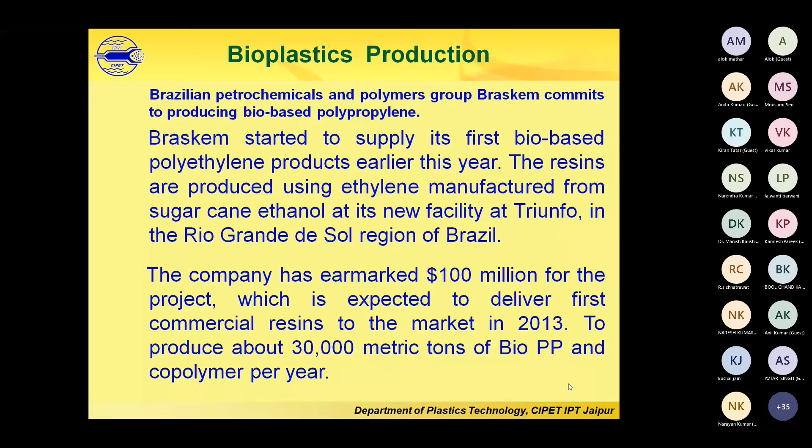Biopolymers from renewable resources are going to play a major role in the future plastic industry. Being an agricultural based country, India has plenty of resources to produce bio-based plastic materials. Use of biodegradable polymers, particularly for packaging applications, is the only alternative to petrochemical based plastics to save the environment.

Okay, of course I'll come to that - it's a different topic, why biodegradable polymers are needed. Thank you, if you have any questions please ask. Since it is a new area, if I am not clear on something, I'm extremely helpless in some cases. If you have any questions, you can ask me, I will tell you.

Any chemical based participants are there? Chemical engineering participants, they would have questions.

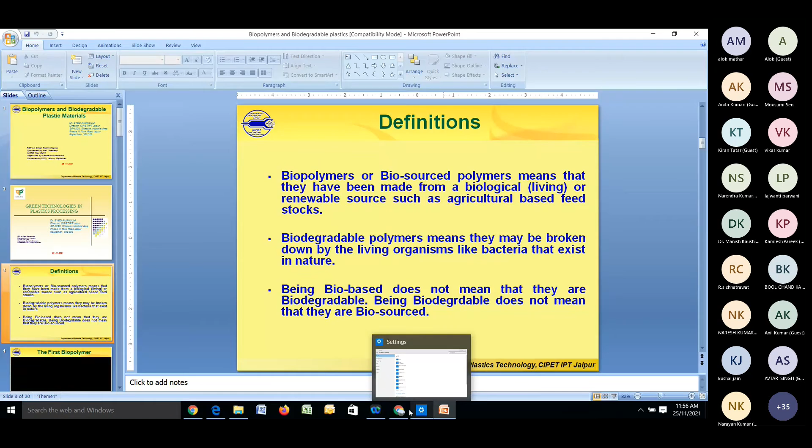Hello. Hello. Hello. Hello. Hello. Yes, Yes, sir. sir. Yes, sir. Yes, sir.